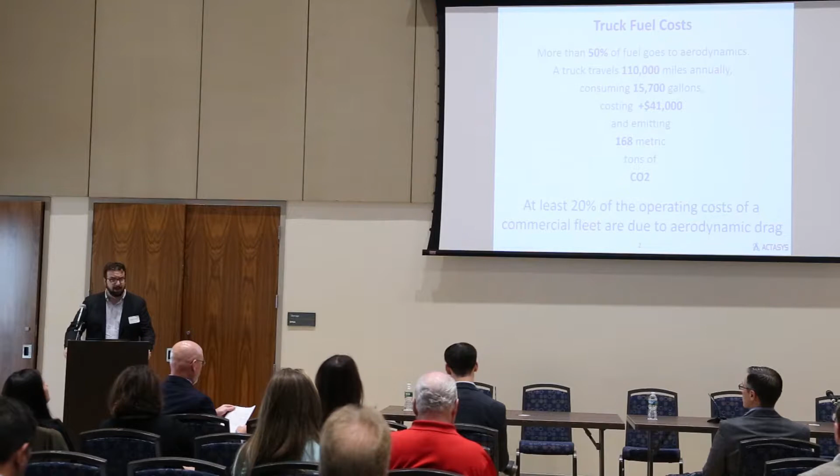And if you look at it from an operations point of view, the typical fleet operator has more than 20% of their operating costs coming from fuel, and that's directly correlated to the aerodynamic performance of their vehicle. So the problem we started to analyze in the beginning was: what can we do to improve this?

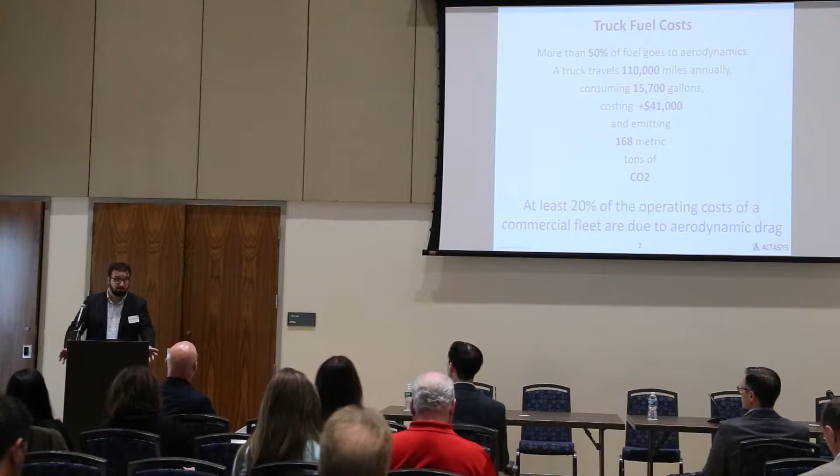We can change the shape of the vehicle, right? That's what you typically do to change the aerodynamics. And the problem is that in this industry, it's very tough to do that. They tried to do that in the past, but the whole industry is based on this very terrible, brick-like shape, and it's really tough to change it. They tried, they did marginal changes, but nothing that changed a heck of a lot.

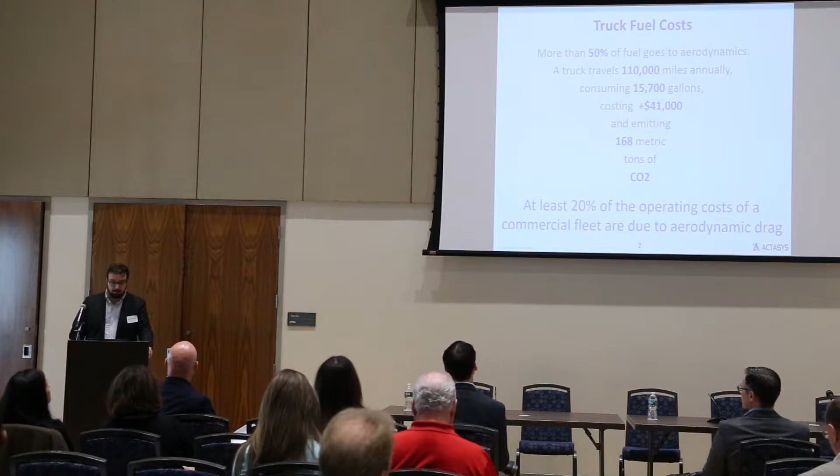So we said, okay, what can we do? The challenge is changing the aerodynamic performance without changing the shape. And we were extremely lucky to have this very simple but very efficient product, or core technology.

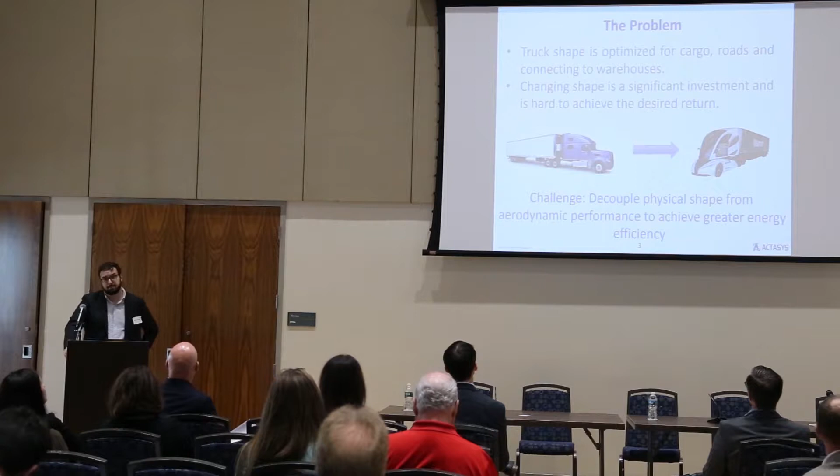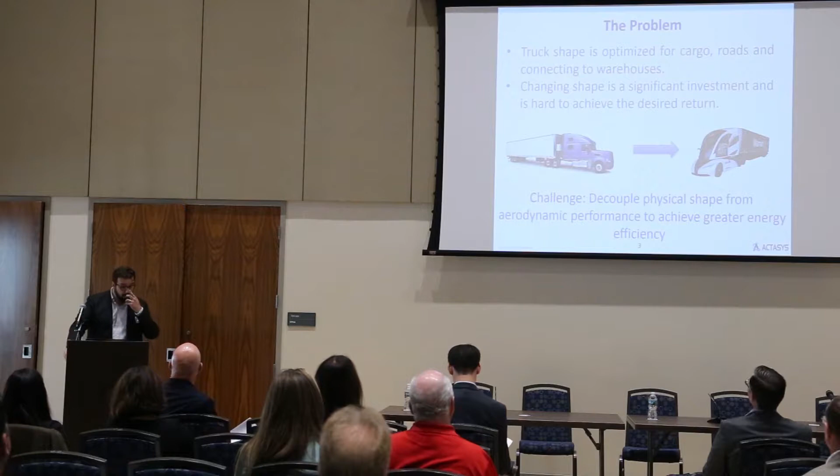It was developed for the aerospace industry, for airplanes, and what it does is use a very small amount of energy to produce very powerful jets of air. Literally it's an extremely compact compressor with an energy efficiency that is almost one order of magnitude higher than your typical compressor. So it's extremely efficient.

So what do you do with this? Well, if you put these in key locations on a tractor trailer — one key location being the gap between the tractor and the trailer — you can streamline the incoming airflow. The incoming airflow that would try to get into the gap between the tractor and trailer, generating turbulence, can instead be managed with these actuators, which produce jets of air that create a curtain of air connecting the tractor to the trailer.

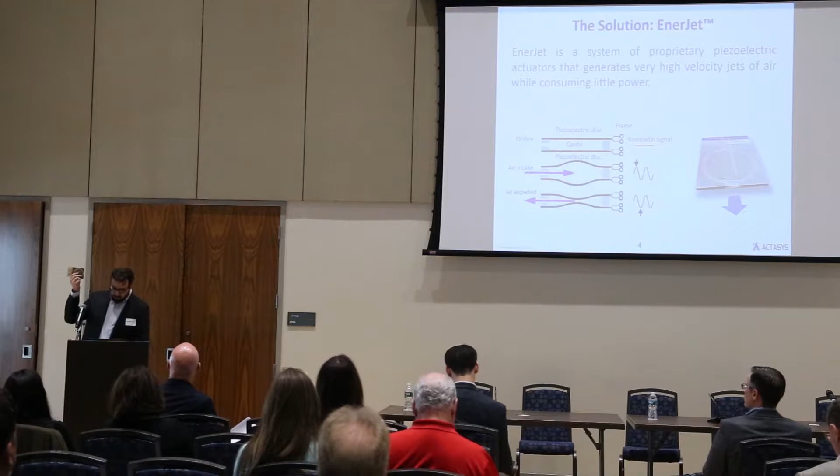So the incoming airflow, rather than infiltrating between the tractor and the trailer, would just continue to flow. By doing that, we proved that we can increase the aerodynamic performance by 20%, which translates into about a 10% increase in fuel efficiency.

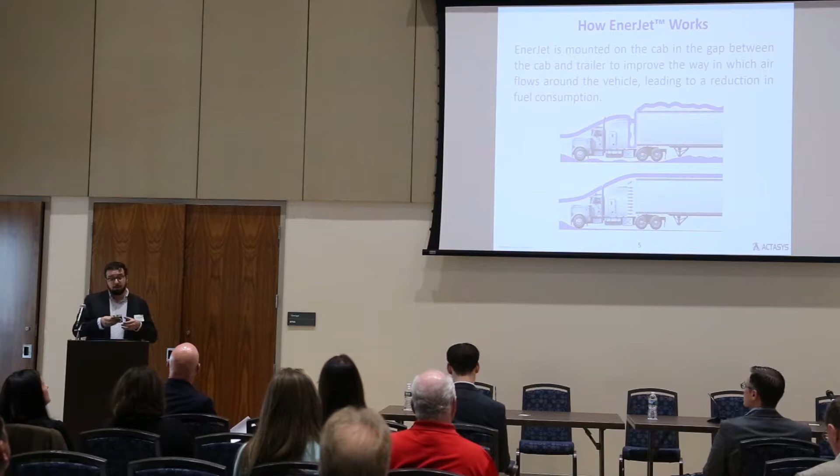Now, the beauty of the system is that it's smart and dynamic, meaning that we connect to a database of weather conditions. We have onboard sensors with which we can detect local weather conditions, including crosswind, and we can adapt our system to maintain optimal aerodynamic condition based on the local weather that we detect.

We get any kind of data to operate our system, including acceleration of the vehicle, velocity of the vehicle, geolocation — we know where the vehicle is, we know the crosswind acting on the vehicle, temperature, and so forth. So we take all this data and feed it to the control system of our active flow control system, and improve the aerodynamic performance.

We tested this with local fleets. We proved that we can get the energy efficiency that I mentioned, which comes to about $4,000 saved per truck per year for the transportation industry. We're planning to start extended trials as early as the beginning of next year, and to commercialize the larger technology towards the end of the year.

Now, this was what we started with. This was the hardware solution for our company.

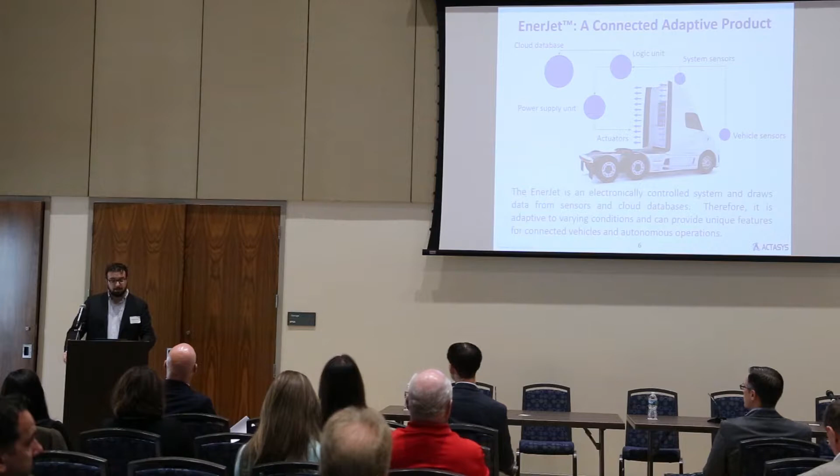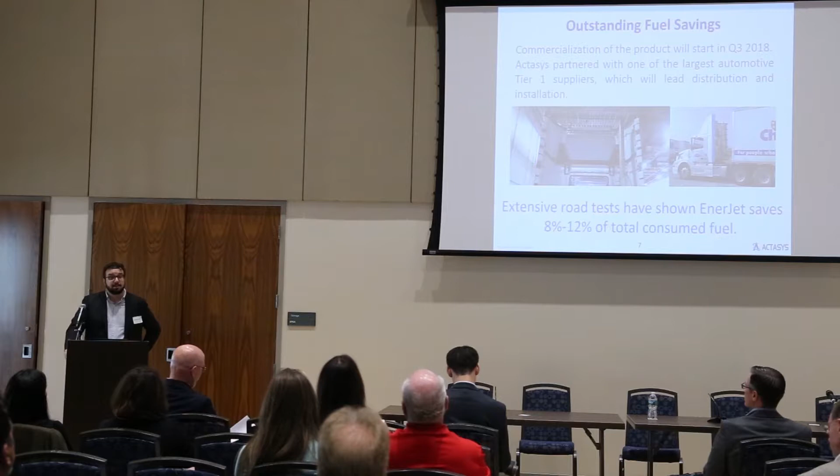When we look at the system, you see that we have a cloud database, because we stream all this data from the truck to a cloud database. And we asked ourselves, how can we monetize this huge amount of data that we have? The idea we came up with was to use this data together with external databases related to weather conditions, to analyze routes from an aerodynamic point of view. This is something nobody is doing right now, and it's extremely important because aerodynamics is key. It's 50% of the fuel consumed on trucks that comes from aerodynamics. So we asked ourselves, how can we do this?

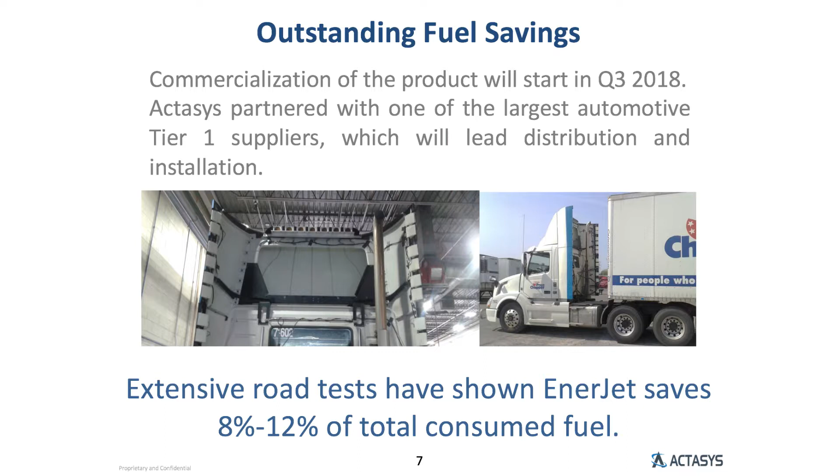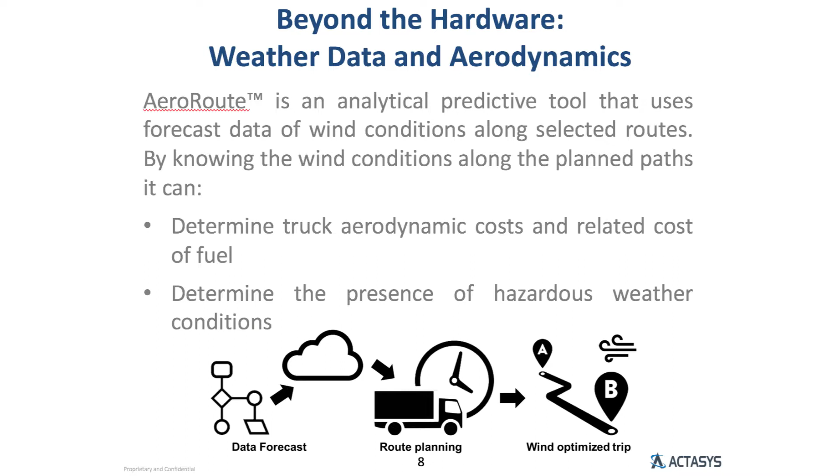The way we did it is very simple. We came up with this tool, the AeroRoute, where if you're a fleet operator and you want to go from point A to point B, and you have say 4 different routes that are the same length, same traffic, same tolls, what we do is look at the forecasted weather conditions along the route. We determine the wind direction and intensity along the route at a specific time defined by the user, and we determine the aerodynamic impact on the different routes. We can literally go down to a dollar value we can tell the trucker or the fleet in order to optimize route planning. So we can tell them, if you're picking route 1, you're saving $20. If you're picking route 2, you're spending $30 more than your average.

Clearly this is a route planning tool, but we also have a real-time component where we can notify the user of hazardous weather conditions along the planned path. So we can also do that through the data we collect in the territory.

We performed a use case study with a local fleet. They typically send a lot of their products on the route between Schenectady and Scranton, so it's a fairly small route. If you look at it, it's basically the same length, and from a traffic and toll point of view, it's basically the same cost. When we analyzed the data, we proved that on average, every year, we can save using this tool approximately $19 per truck per trip. That means if you extend this to a typical medium fleet of about 200 to 250 vehicles, you can save in excess of $1.5 million.

Imagine how this could scale with fleets the size of Walmart or Pepsi, where they have thousands of vehicles. So it scales very rapidly, and the savings are extremely high. You're looking at about 15% savings in fuel for your typical fleet.

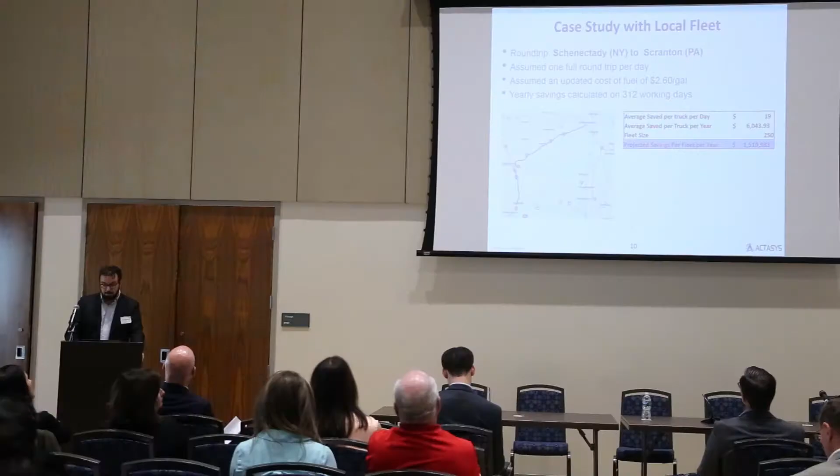So what do we want to do now? We created this tool, but the intention is really to partner with existing companies that are already established within the industry and within logistics analytics. We want to customize this tool to work as an additional layer of optimization and complexity on existing tools that already take into account traffic conditions, tolls, and length. So we want to build on top of the complexity that already exists.

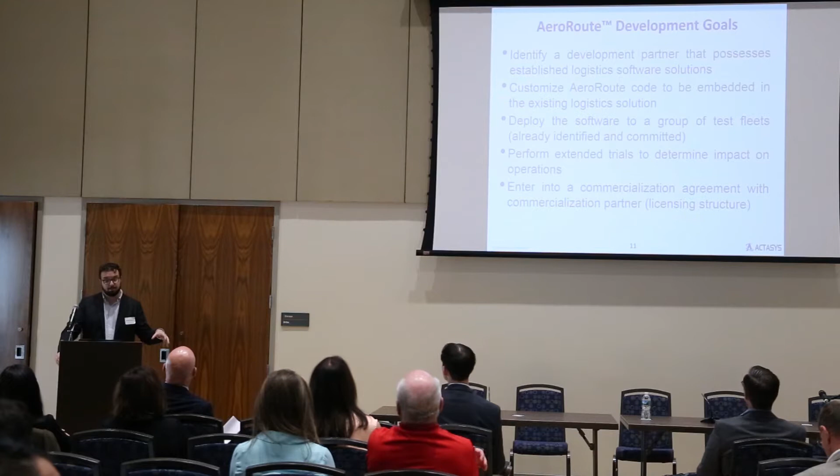We're planning to deploy this to a group of fleets that have already been identified. And in the end, we really want to find a commercialization partner that will take this tool, add it to their solution, and commercialize it, because that's not exactly the focus of our company, which is more on the hardware side.

For the future, and it's very interesting because I saw a lot of you talk about this, clearly we want to get into the autonomous vehicle market. There is a lot of value in this. As I mentioned, we have a hardware component. Imagine having this hardware mounted on big fleets throughout the United States. We already have sensors mounted on them, so we'll be able to gather all this information, create a network where we can repurpose this information, customize it for different customers, and resell it. So, sell the data.

That's pretty much it. Thank you so much.